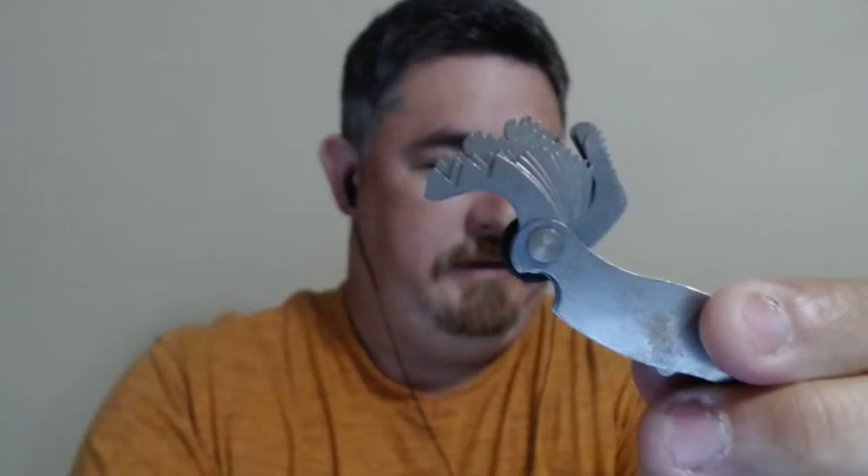And I have a thread gauge here. So, one focus. So it's got a bunch of teeth on it. And there's a number on each one of those. On each one of those, there you can see it. That's how many teeth per inch it is. So this is a 10.

So 10 is either a 24 or a 32. Excuse me. And this does not have those sizes. Oops. Here's a 32. So the thread gauge does have a 32, and it looks like that is it. It mates nicely with the screw. Yeah. So the teeth match. So it's a number 10-32.

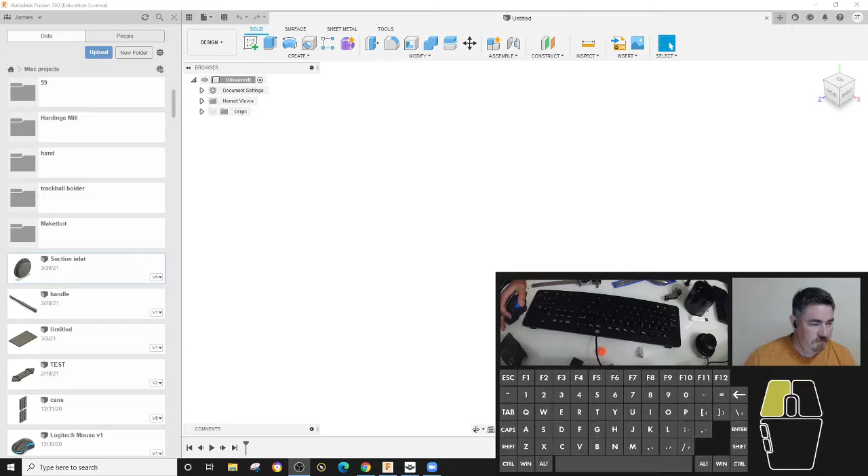So where did my pencil go? So that is number 10-32. So I wrote that on my drawing here. And I'm gonna draw a little picture of the snorkel going back, and time to measure that. There it is.

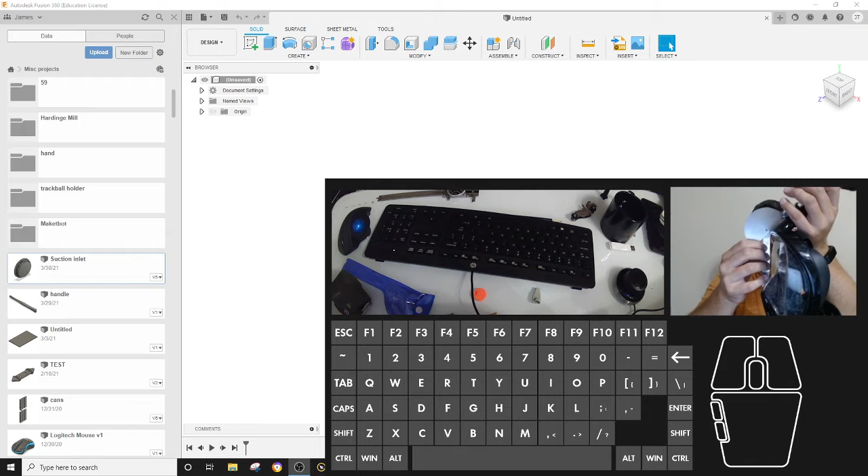My work area is a little cluttered, so I'm just gonna kind of hold this up and just eyeball it. It doesn't have to be exact, but it looks like it is about at 45 degrees back. It was almost exactly right there. I see. And so I just put it kind of on that forward edge and made it so that the beam, this part was parallel to the glass, and then this part was parallel to the snorkel. So even though it wasn't resting exactly on it, it was probably within a degree or two.

And the rough number coming out close to 45, that probably just means that 45 is the number. When you're measuring things, there's always an amount of rounding you have to do to say, okay, what did they really want it to be? Would they really have done it at 43 degrees, or did they actually just do it at 45? Have you ever been confounded by something that really was just an odd angle, like 42 degrees? Yeah. And so sometimes, it's experience to know when that weird number is supposed to be that weird number. When it falls on something nice or when it falls on something strange.

Yeah. Especially on measuring thicknesses and things. Sometimes you get to a real weird number, but then you do the conversion to metric, and it's right on like 10 millimeters or something like that. Yeah, it's like 99.999 millimeters because it does a weird conversion somewhere. It's like, okay, this is a metric part.

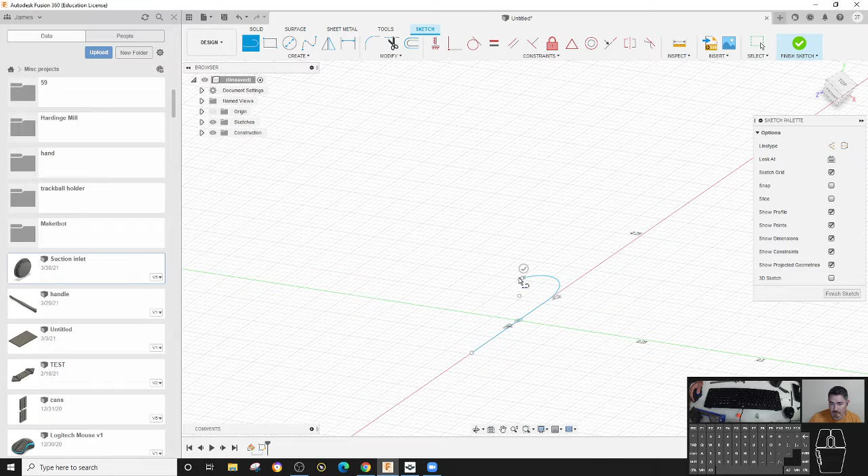So now I'm going to just create a construction plane. So I'll add an angle. I'm going to pick that line, 45. And say okay. So I'm going to create a sketch on there. And just draw a line across. Oops. Because I have those tangent arcs. I want to hold it. Come up. And I didn't hold it again. There we go. I don't know if I have a zero length line segment there. There we go. Take that out.

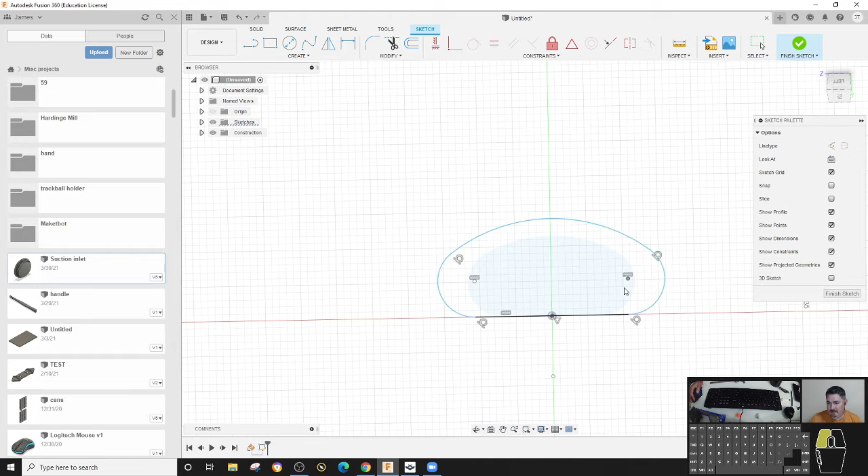All right. So we've got this kind of a shape here. And now it is time to do some constraining on this thing. So first thing, I'm going to tell midpoint to this line to there. That to be tangent there. That to be tangent there. Tangent there. Tell these two center points to line up horizontally with each other. And now it's behaving nicely. So this is what I was talking about, doing your sketch rough and then just going in and checking to make sure it works. Piece by piece, constraining the behavior.

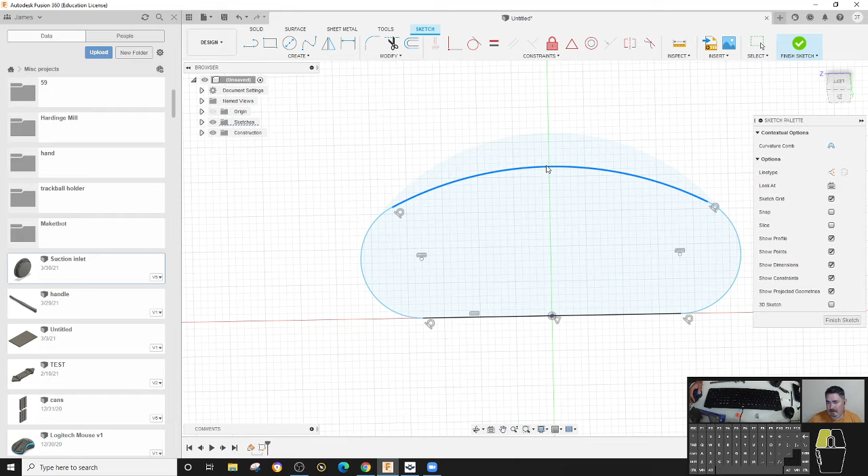I remember that I had a little extra zero length segment there, so I erased that, and now you can see it's not tangent anymore. So I'm going to add that tangent back in. But I can see that as I'm grabbing one point and moving it around, it's still behaving the way I want it to, and that's what we want. And so grab an arc segment or a point of some kind and move it around, make sure that it behaves correctly and stays the same shape that you want before you start adding any dimensions to it.

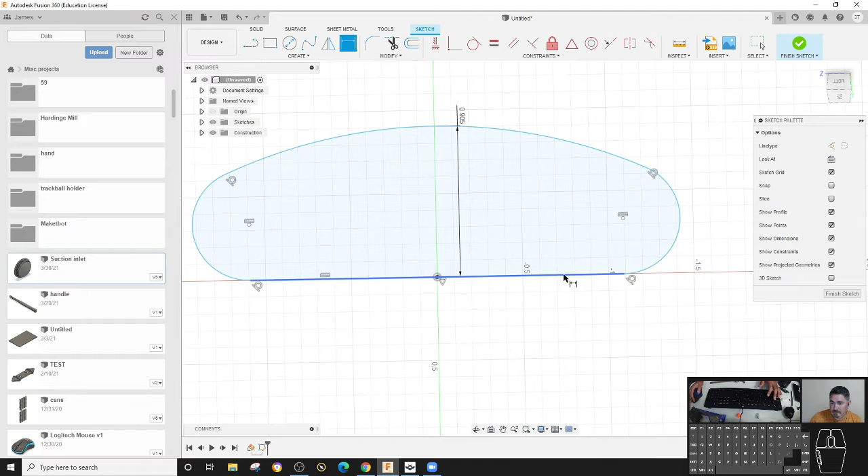Because now I can go in and add my dimensions pretty easily. So I can dimension from here to the tangent point there, and that's supposed to be 0.905. So I made it really big, kind of blew out my proportions, so I'm just going to drag this out so I get more towards those proportions that I want. And then from here, I dimensioned it kind of to the tangent point. So from there to the tangent point was 0.875.

Again, I'm going to pull that back out. And then dimension from the tangent of there to the tangent of there. And that was 1.9. And so that really gives me about how much of a curve there is there. I'm just going to finish. And realize that I did that upside down, because that should be the upper side of it, not the lower side of it.

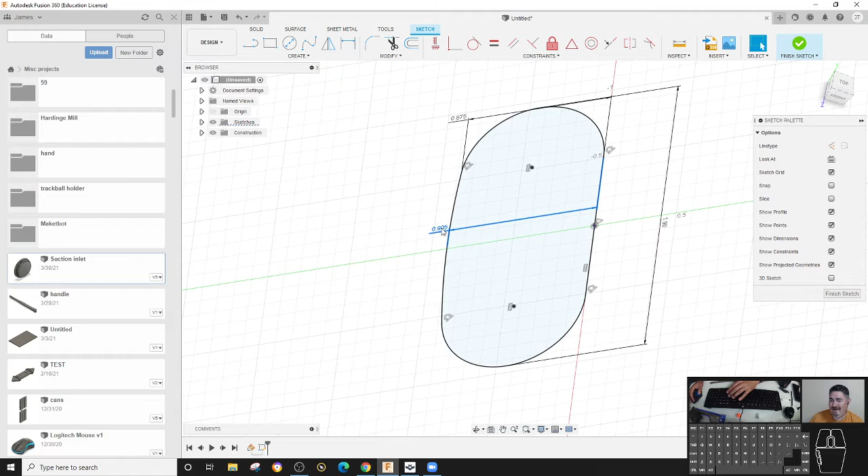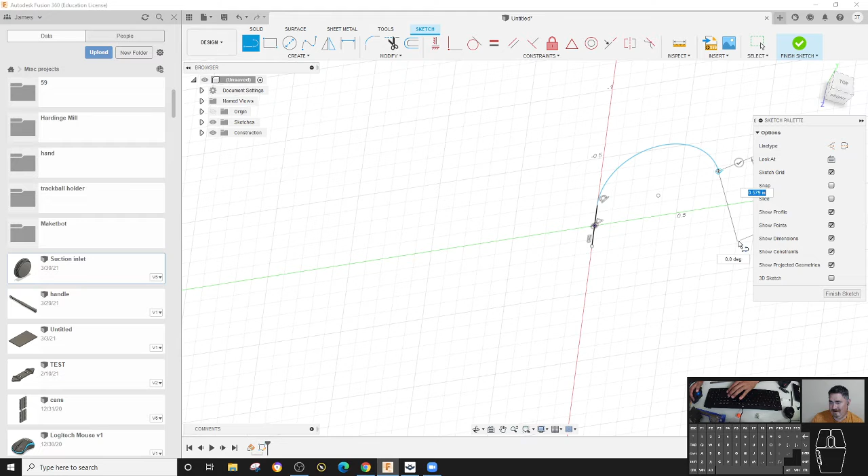So I'm going to go back into here. Could you just mirror it once you finish an actual piece of the part? Yes, but I don't want to do that. I'm going to just erase that. Understood. Erase that. Erase that. So I'm just going to take that arc out. Redraw it. You'd much rather do it right than just move it to the next correct state. Yeah, because then you're constantly trying to fix things.

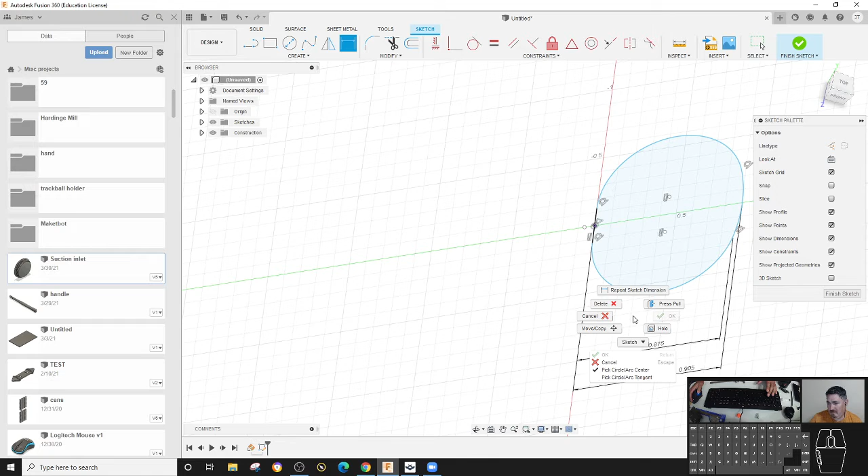So we get rid of that also. So we'll just do this again. But this time the right way. Yep. That's what happens if you don't stretch things out beforehand. Sometimes they do that. There we go.

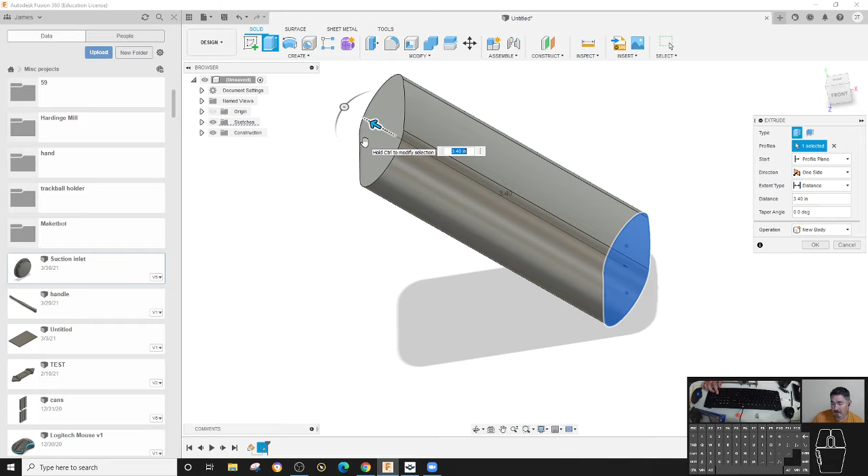I really don't need like 3 inches. So I'm just going to make it like 3.4 inches long. Because it doesn't really matter where that is. Because if it's on here, then I've only got this much space. If it's here, I've got that much space. So maybe I'm going to put a, yeah. I'll just leave it like that. Because I think I'm going to do something for up here maybe. Actually, it really doesn't matter. Because maybe I'll do a circle and a bigger clip just to see how it goes.

What do you think is better? Trying to do just a base for one of these clips and the clip goes in, or having it so I can just permanently mount that. The mount seems like it's got a better hold than the clip. The first one, doing this clip, this mount, or yes. So yeah, this one's making a base so this can slide into, that'll be attached to here. Yes. Okay.

What do you think? It's gonna be in the pool, the ocean, lake, the river. Probably more pool and river, but our pool is saltwater. But this weekend we're gonna go to the Kings River to go camping, so it'll be in the river and stuff. So that was a good question. One of the things we're going to talk about when we talk about your projects is the requirements for it, and one of those is where is it going to be used, and stuff like that. So does that help you give a recommendation?

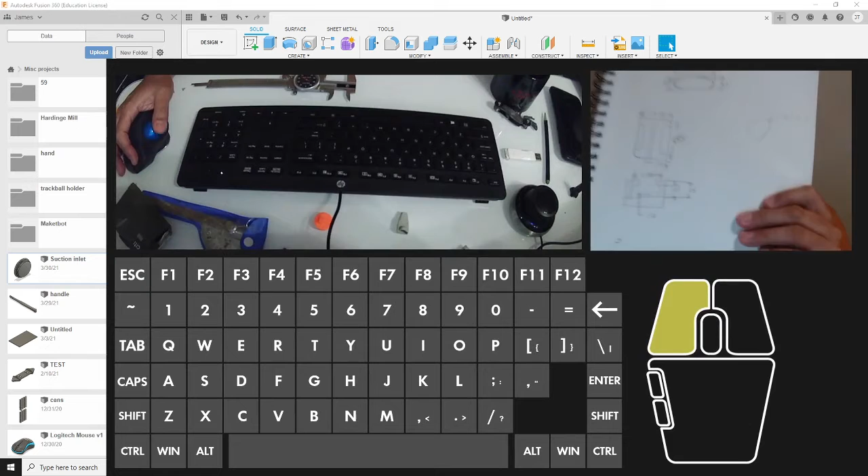And so last night I had already gone through and measured that out. So my son is still sleeping. We're just gonna do this without him.

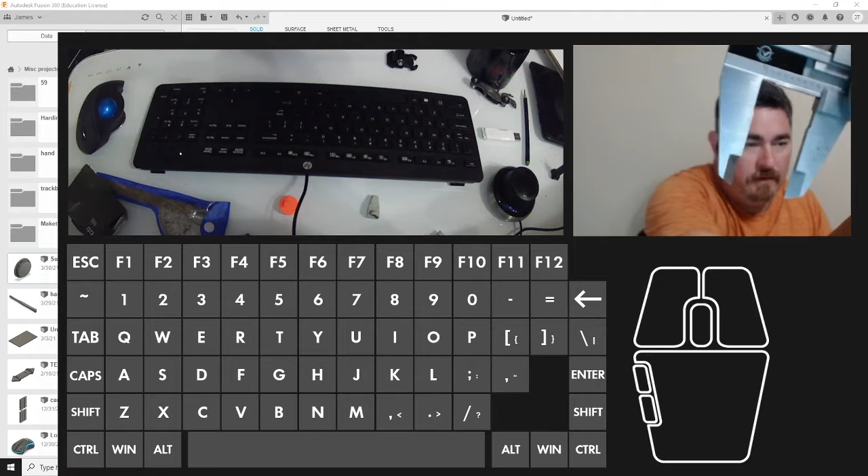So you can see the dimensions here for the clip mount. I didn't include everything, so I probably should get that dimension between those two. But that's kind of the dimensions that are needed. The outside dimension really doesn't matter for the mount. And then the bottom will replace once we make it match up to this. So I do need to get that other one though. So make sure that this is the right clip mount for this part. And, point 842.

So I just added that right there. Come on, focus. This camera doesn't like to focus sometimes. There you go, 842. And you can see my dimensions, they don't follow all the rules. I just stuck that one inside the envelope. But even on the sketch, I try and follow some of the rules.

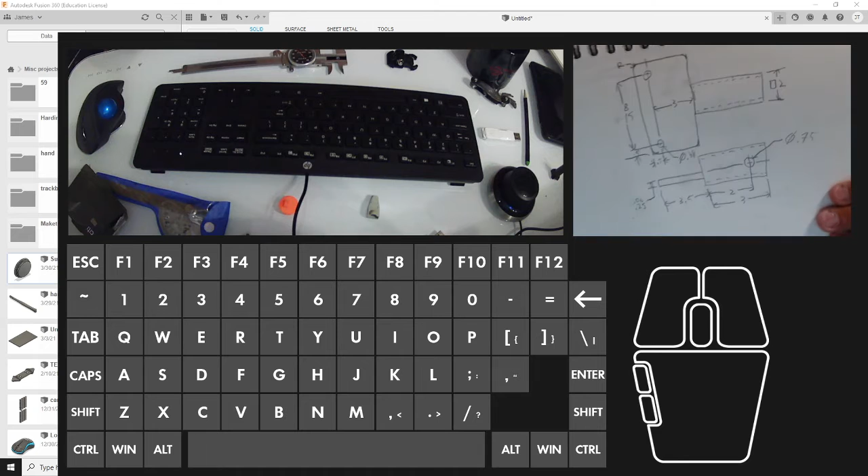Aren't the rules more for giving technical descriptions rather than for prototyping? Yeah, the rules are more on the final drawings, and so we don't have to follow those rules on our sketches. But I still kind of default to doing it a little bit. So like here's another sketch I did of something. Even when sketching, you've got the instinct to be drawing. Yeah.

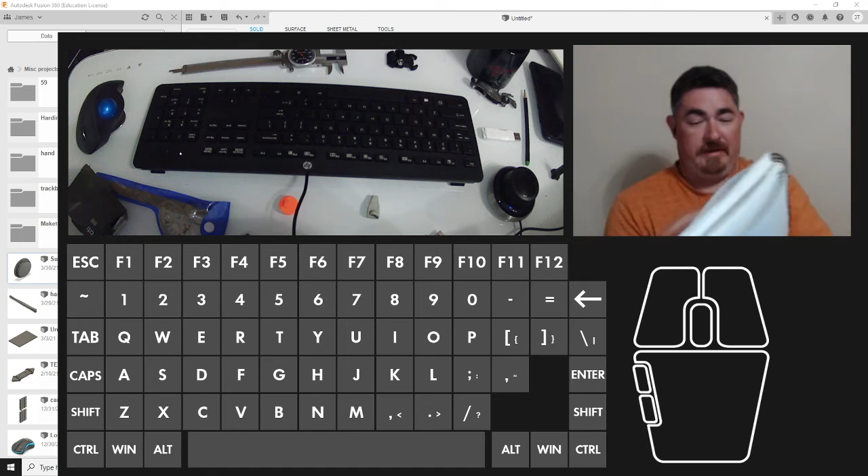What is this? So, I don't know what that is, but yeah. So I'm always constantly sketching between these two sketchbooks. I've lost that one and it was sitting on the floor right here by my desk. I just saw it this morning.

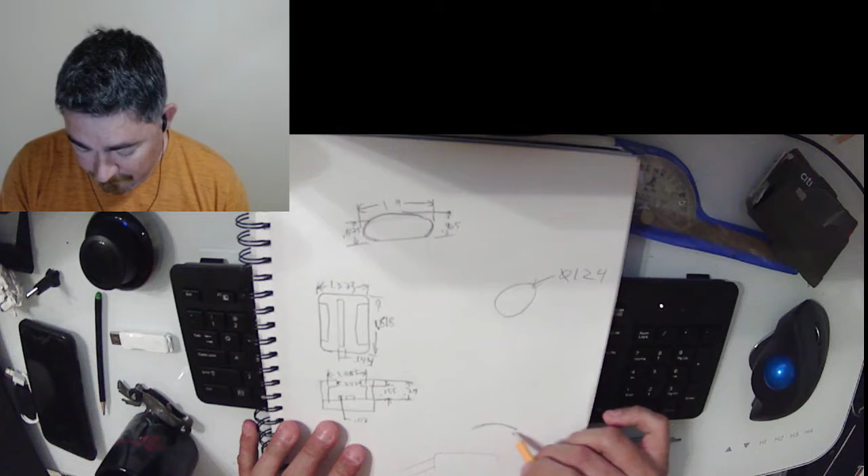All right, so what do I want? All right. So I'm thinking that I'm going to have kind of that shape, but it's going to have the convex bottom and then it's going to go up. Flat bottom. So it'll be just basically the regular clip, just with the convex bottom on it. So just take this, but convex to the bottom, or concave it.

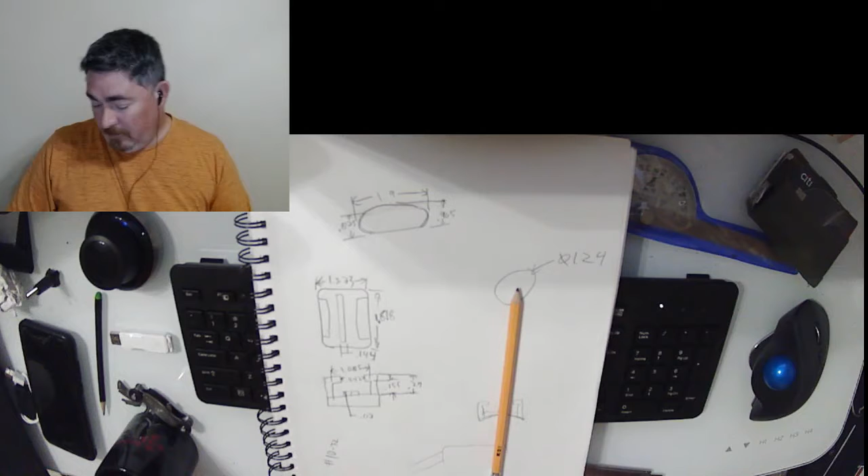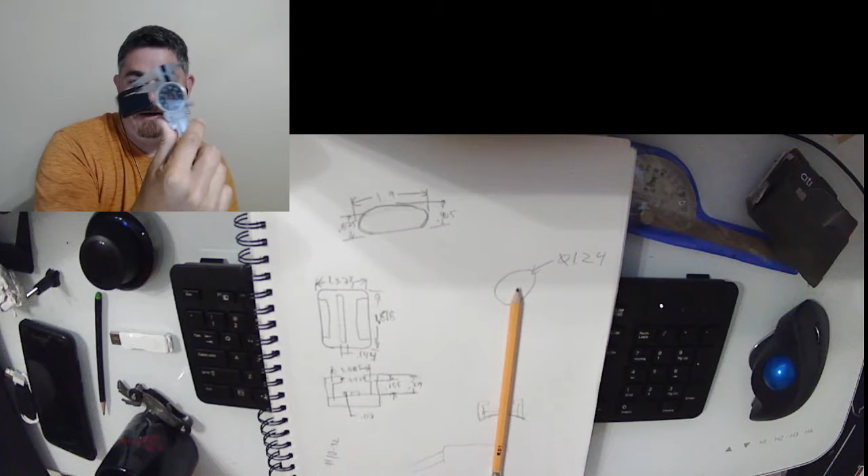Do you have an idea of like the minimum thickness that would be sturdy? So on these ones, it is, I don't know what these are, but I've found that in 3D printed parts, depending on what it is, the minimum thickness to go is like .03 or .04. Once you get bigger than that, you've got strength. These wall thicknesses here are a little over 1/8 of an inch. So I might just replicate that, especially since these are going to be pushed on. Okay. So I might just keep that.

But I don't want it to look square like this. I'm actually going to round it a little bit. Let's see. Here, that's got this here. Maybe I'll just cut these corners off here. Yeah, because you don't need to include those. Those are just a part of the part you're modeling. Yeah.

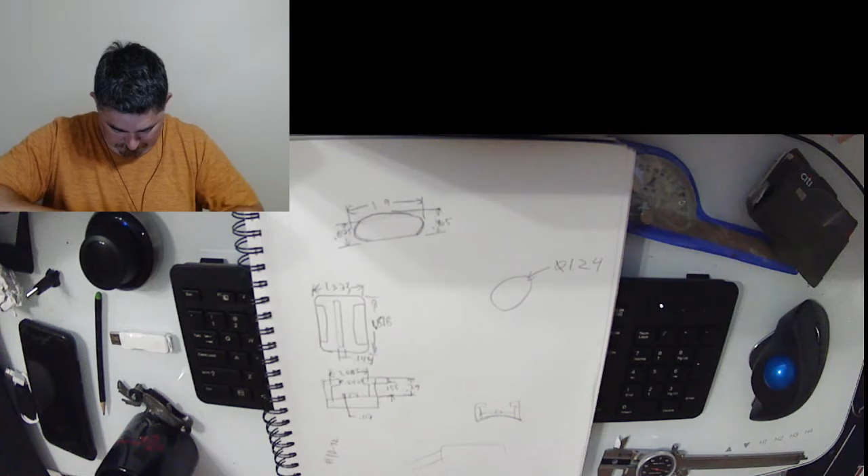And actually, I might make the inside spacing this .185 right here, that inside, because these are really tough to get in and out. I might make that a little wider. You have the control. So that way it's kind of a looser fit.

Did you cut out there, Craig? Hello? Yeah. Yep. You got out like halfway through your word.

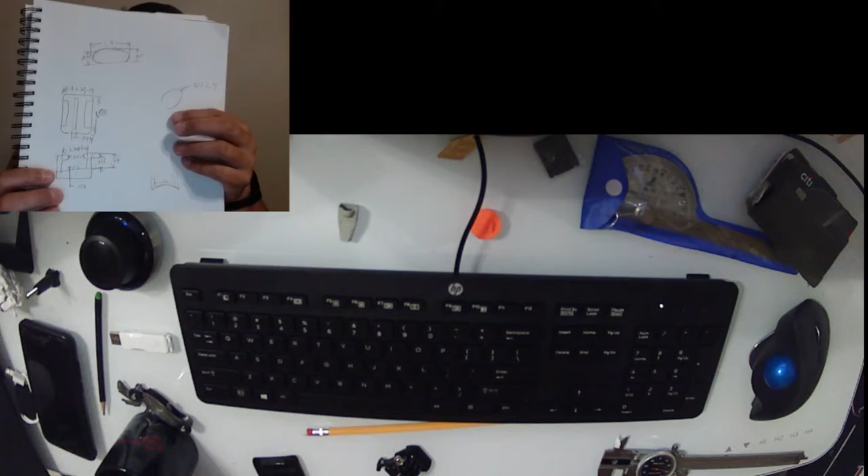Oh, I was just saying, I forget what it was, but you said you have some control or something like that. You have more control over adjusting it around the problems you see. You've had problems with it being a little bit too stiff, and so you can always adjust your version of it to be correct. Yep.

And just to make sure that this distance here is a critical dimension, because that's how long that needs to be. I hadn't actually written that down. So I'm going to record that right now. Time to pull out the calipers. Yeah. So that is 1.1. And so I have that.

And the 3D printer is going to oversize everything a little bit. This printer oversizes things. It draws about a 7/1000 line. So I always make sure that I subtract 7/1000 from any dimension. So that gives space for the clearance on both sides. It's just one of the things that I know about this printer.

Is that because the printer is moving the tool path along the dimensioned outside? Yeah, so it's drawing on the line. The thickness of the plastic that it's extruding actually steps over. Yeah, and there are adjustments you can make to adjust that. But for me, it's easier just to make the adjustment on the model than to spend hours and hours fiddling with the printer. It's a lot more direct just to have something that prints nice the first time. Yeah.

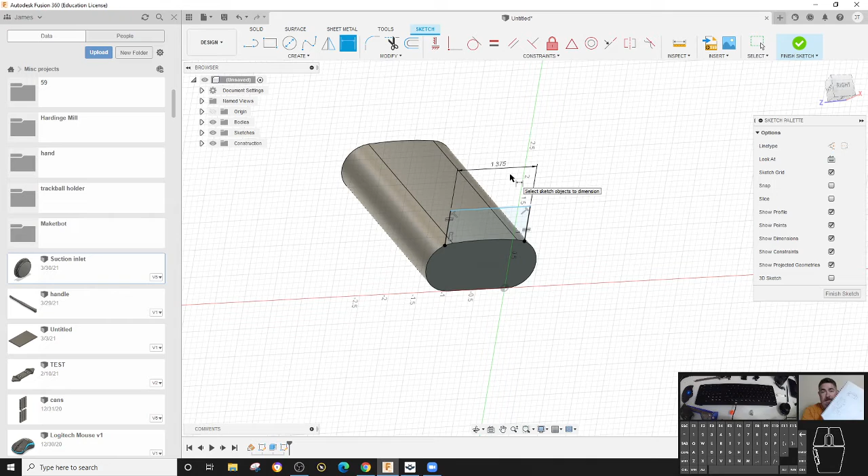I don't know why it's doing that. Oh, because this one was on the circle, so now it's staying on the circle even though the circle's not there. But if I keep it out there, I'm fine. And then that's going to be 1.375. When I measured it was 1.373. So I just rounded it up to 3/8.

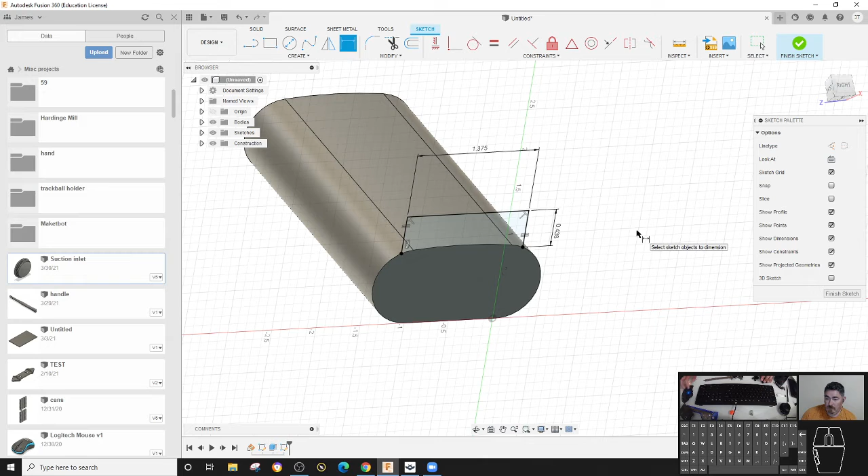The overall height of the little things on it is 0.29. It needs .155 for in there. So I'm gonna just add in some. So I'm just gonna make that 4.375. I'm just gonna finish that, extrude it. I want it to go up a little bit, so I'm gonna tell it to go back 0.5, and I want it to be 0.5.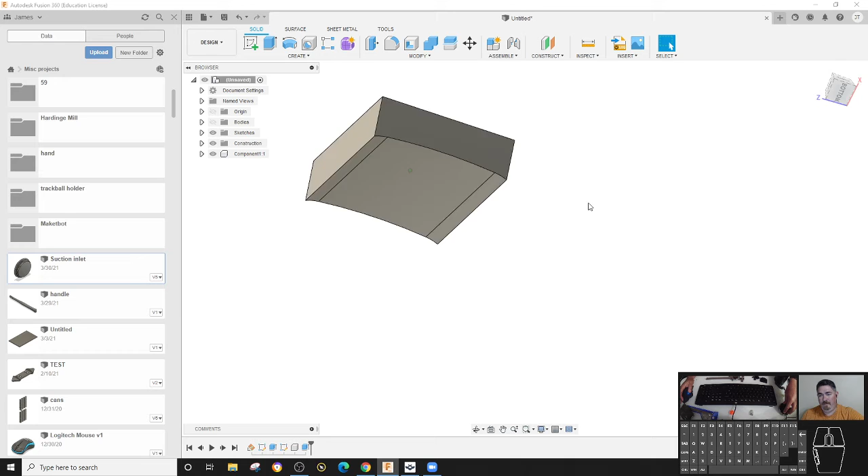And I want it to be a new component. So now I've got that new component there that has the right profile here, and it's got the right height that I can start working on it. Does that make sense? Yes. Alrighty.

So now, what should I do next? What do you guys think? Would now be when you start figuring out the profile to extrude and cut through the center of it? Yeah. So perfect. I'm going to cut this out. And I'm not going to worry about the little thing in the bottom. That'll be its own feature? Yeah, the little thing right there in the middle. I can add that back in easily.

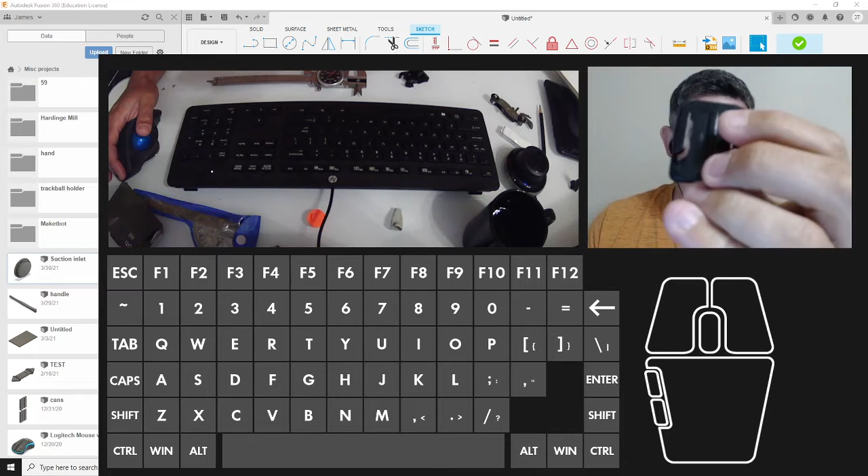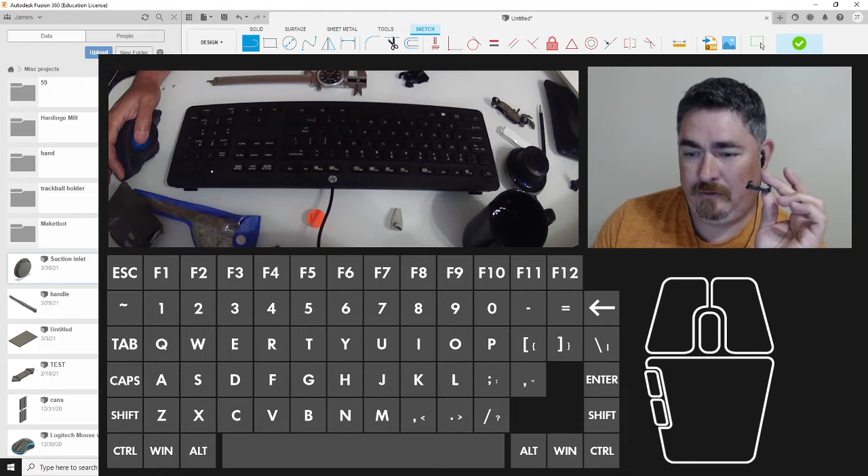Trying to make it so that I don't cut that and then I have to go back and cut the front and the back of it anyways. It'll probably be longer to try and keep that in it right now. So I'm just going to take that out and I'll add it back. And because this part is symmetric, I'm only going to draw half of it. So I'm going to go from the midpoint, down to where my base is going to be. I'm going to go over, up, up. So I'm going to draw half of it.

That way I'm saving. Your keyboard is in the way. Okay, there we go. So I have that much of it because I can mirror this over to the other side. And that saves a lot. It gave me one line instead of 3 lines that I'd have over here. And I can pick this line.

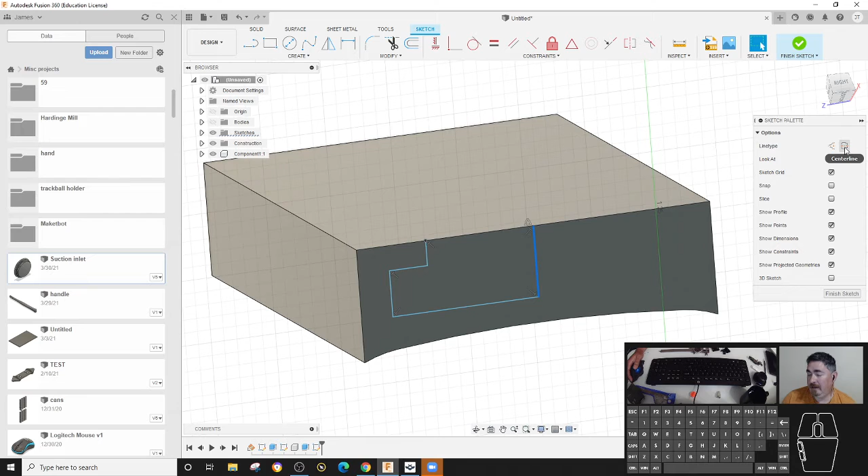One of the new things that they added in is the center line option here. There's a center function in Inventor, where if you make that into a center line, now when you dimension from that line to another point, it gives you the full distance across. Oh, that's interesting. Does that center line actually enclose geometry, or is it open at this point? Yep, it encloses. Okay. It's not a construction line. You can make a construction line and a center line. There's still the construction option here. And that is very interesting.

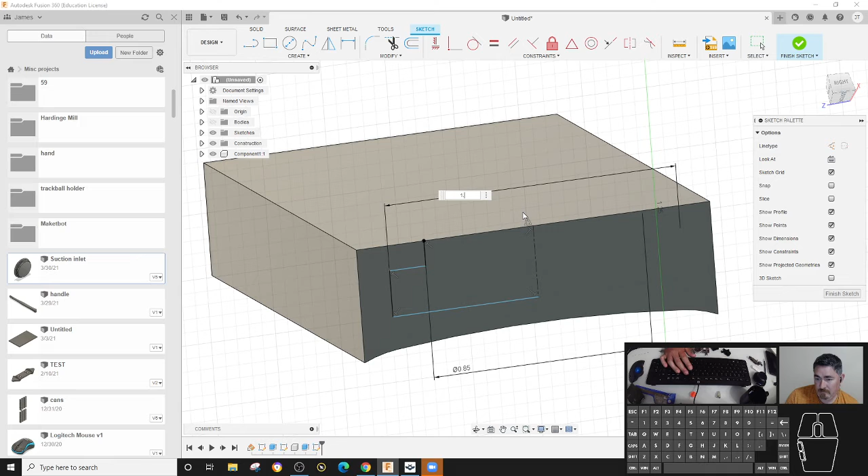So that was supposed to be 0.842. And actually, plus 7 thousandths, so I'm going to make it 0.85. Make it a little looser, a little easier to use. The same thing here, from here to here. That's supposed to be 1.085. Oh, 1.1? And so I need to add my 7 thousandths, plus I need to add a little extra. So I'm just gonna make it 1 1/8. Okay.

That dimension there needs to be my 0.155. I'm just gonna give that a little extra space too. And so those are really my critical dimensions there, where this isn't as important. It already had the 0.29, so I'm just going to go with that. So that gives me a good thickness there and a good thickness there.

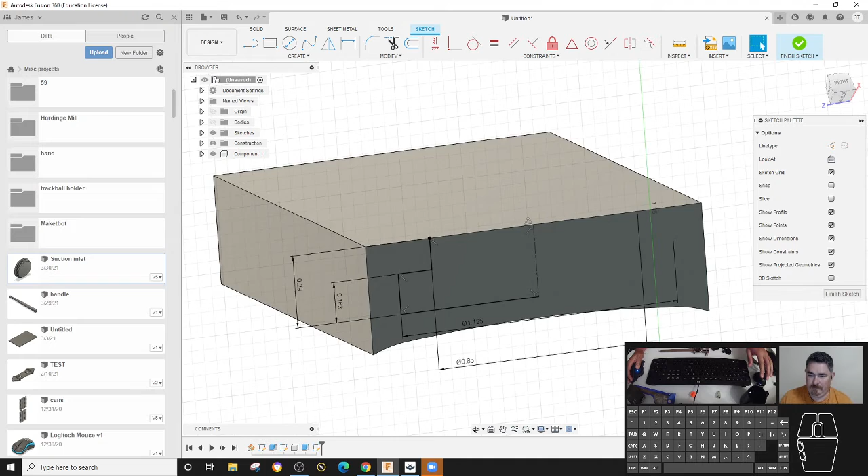Let me just verify. Helps if I hit the right button. So I'm going to dimension from that point to the tangent point there. That gives me 0.08, so that's plenty thick. That's structural? Yeah, because that's the base that it's going to sit on. So yeah, that's good. I remembered you saying about 0.04 or so. Yeah, so it's more than that.

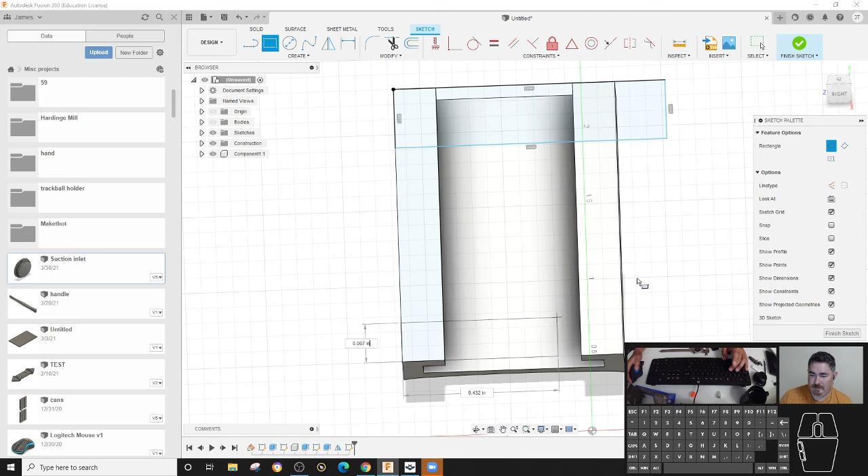So I'm going to finish, extrude that all the way through and flip it. And then I'll just mirror the feature across that mirror plane right there. And so now I have that. And so I can create a sketch on the top. I need to cut those down to the right size. So I'm going to turn that into a construction line, so that way these pick the whole thing.

I'm going to make those. You can set the edges to construction lines? Yep. Okay, I didn't know that. The projected edges, when they're projected automatically, they don't show purple like when you project them. But you can still make them into construction lines or center lines or erase them. I didn't know I could interact with them, so I always just included extra bits on the other side to finish. So I'm just going to pick that line and that point and make them coincident.

Did not let me do that. There we go. Coincident there. And make this line here and that line there equal. That way these move that way. Oh, sorry, let me move this over. So now it's moving the correct way.

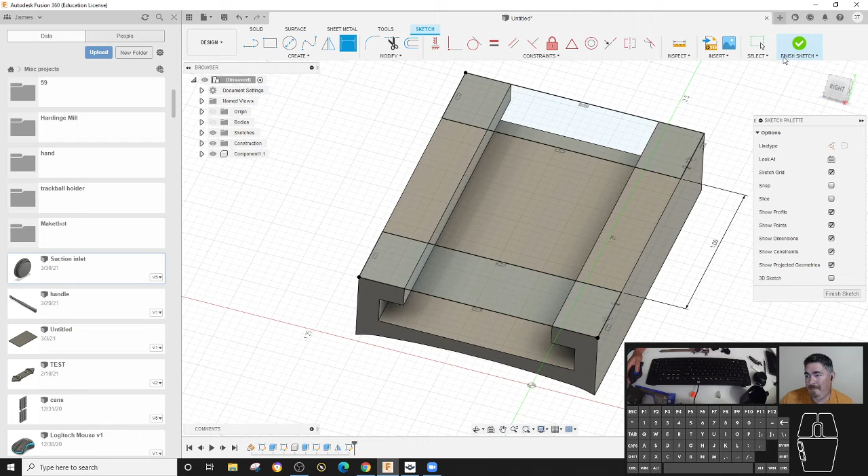And so now I can dimension this here for how much I want left. And I need it at least 1.1. So I'm gonna just say 1. Finish. And so with the 2 boxes I have 8 lines, so that's my max, so I'm still good there. I'm just going to extrude from there to there, and I'm going to go to that.

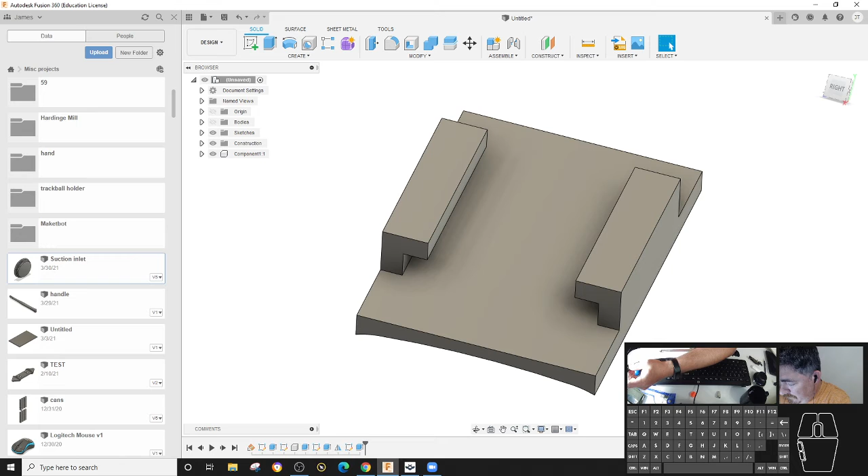Okay. And actually these have a pretty good chamfer right there in that corner. It's a good 1/8 of an inch, so I want to throw that in right now. So remember, if you know where the edge is, you can pick the edge through the object. Yeah, that's very handy when you're going through and selecting, like filleting corners and stuff. Yeah. So there we have that.

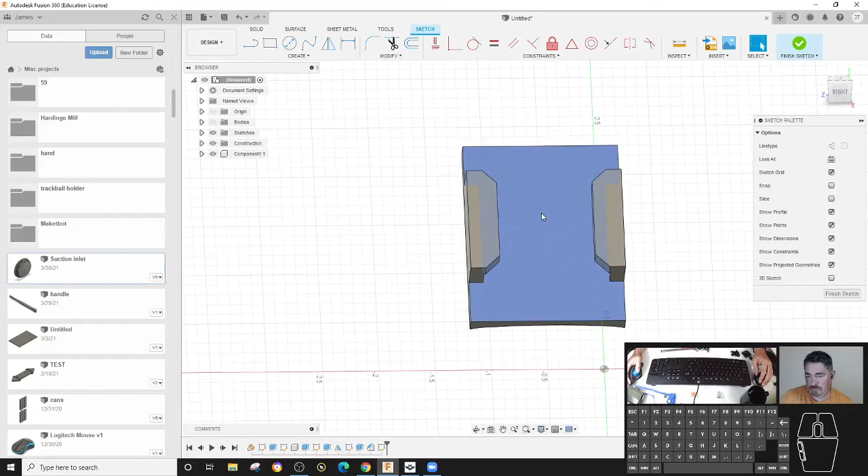And create a sketch there. I do need this to be centered, so I'm going to do a center rectangle. But for some reason that's not centered on the component, like my origin though. Huh. I suspect when you rebuilt the arc sketch, things got uncentered. No, it's just that plane. The origin of that plane that I sketched on wasn't the same as the origin.

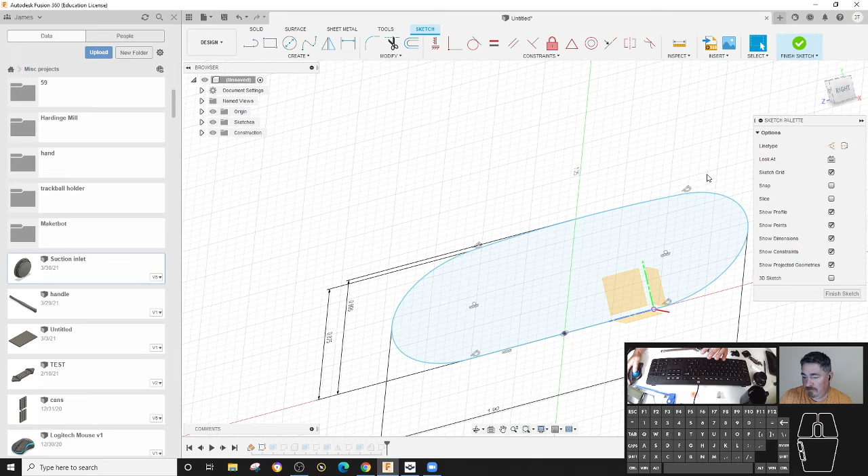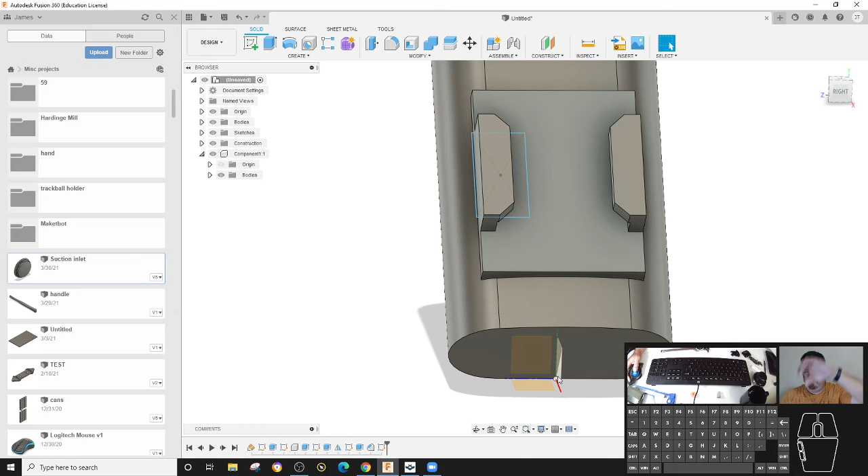So actually, I'm going to delete that midpoint. I'm going to project my origin and give it a new midpoint, and now midpoint my origin to that line. Does the origin need to be projected? I just did. I don't know if it had to be, but there. Well, usually on a sketch, this icon here will be at the origin, will be the actual origin. When you create sketch planes, sometimes they're off.

Yeah, and I probably could have just done constraint, pick the origin. See, it'll let me pick it. But I'm used to just projecting if I have to. That's fine, I just wanted to understand what I was looking at. I did that change there, and everything was built right. Everything slid over. Moving the positions didn't send any sketch wonky. So now I can just make that vertical with the sketch origin, which is lined up with the part origin.

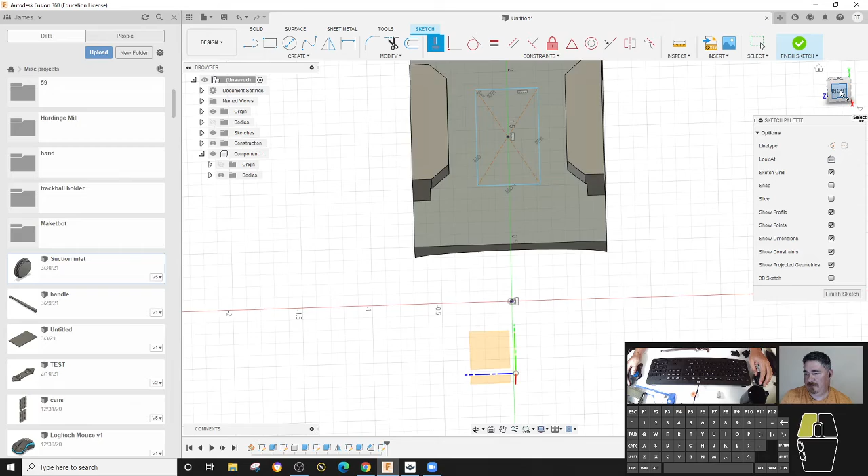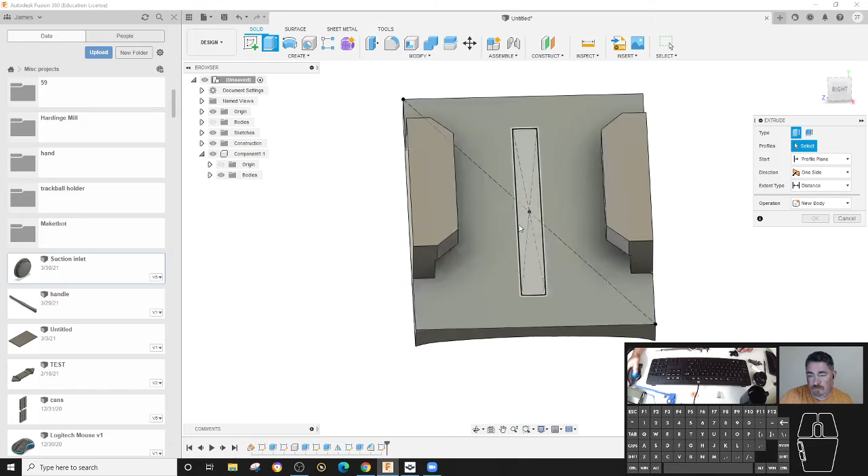So it's there, and actually I want that centered on the part. So instead of doing that, because I want this rectangle centered on this whole part, I'm just going to draw a line from corner to corner, and midpoint from there to there, and then turn that into a construction line. Now that behaves correctly, and that is going to be 0.14 and 1.3 and 0.06.

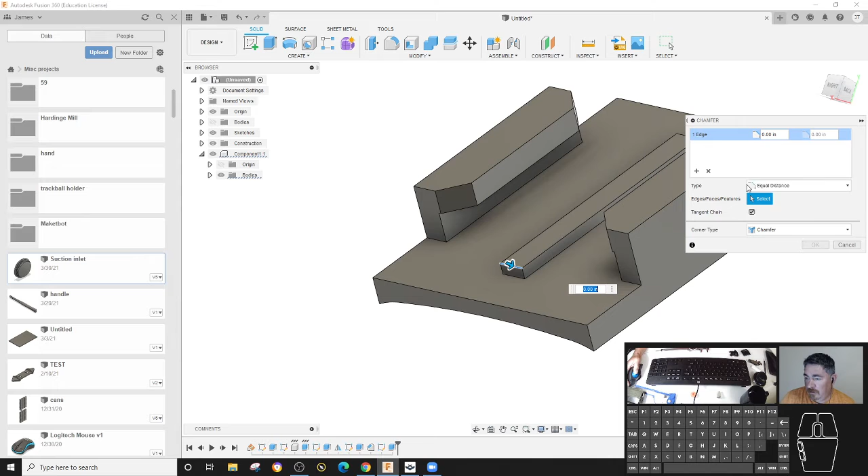But it's got a little chamfer here going up, but it's not a 45, so I'm just going to go in with chamfer, and I'm going to do 2 distances. Go back. Whenever you start with 2 distances, the first time you pull always pulls both. Then you can pull whichever one you like. Yeah.

So I want this one to only go down. If you zoom in, you can get more control. Yeah, I can also tighten more. So I'm just going to do 0.04. Yep, you can be as precise as you like. From there, can I add another one over here? I'll do another one over there. There we go.

So over here, you can kind of see the curve right there. It's tangent to the side. It's got rounds at the end of it. And then it goes up, so it's tangent right here, and then it kind of goes up and angles in. So I'm just going to use that, and I'm going to do a tangent arc.

Keyboard's in the way again. Yeah, of course.

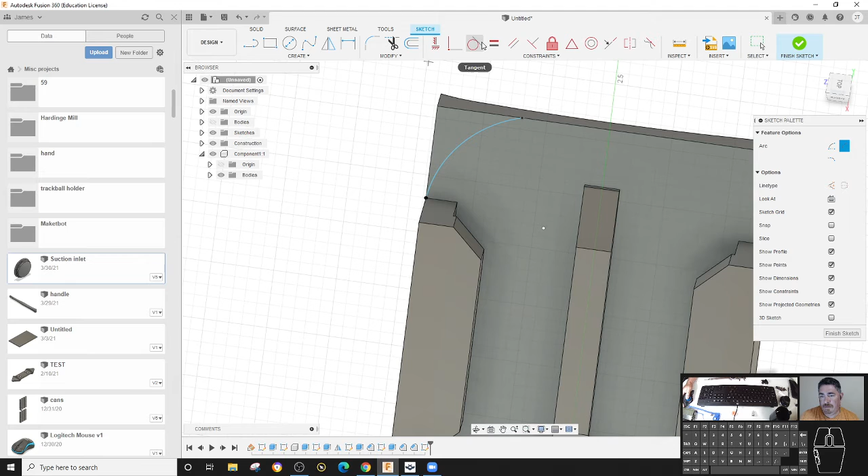And actually, I can't use the tangent arc because I don't have a line going this way. So I'm just going to use a regular arc, from here to here, and then I'll make that tangent to there. And I'll do the same thing on the other side. And then make those 2 equal. And that's tangent. And now I can dimension between those. I find it very weird having equal curves.

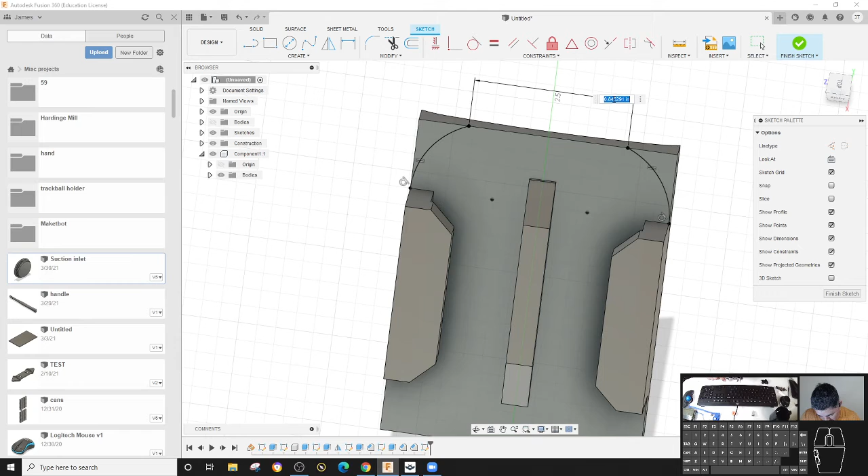What do you mean? So when curves are equal, equal means equal radius. And arc length? When you add the equal constraint onto an arc, it makes equal radius. It doesn't affect the length of the arc, it affects the radius. But not equal arc length? No. Okay, even though they're equal, they just have to be the same size of circle. Their center points are symmetrical across that center. No, that's because they're both tangent here, and so that's making the center point stay there. Yeah.

Yeah. But if it wasn't tangent and it wasn't there, it was just equal, the center points could do different things. They could move all the way around. But both those arcs are staying the same radius. Just as long as they're the same arc radius.

Yeah. So adding the tangent here is what makes the centers stay lined up, because they have to be tangent horizontal to that point there. Yeah. So remember, the line from the center to the point is perpendicular to the tangent line. And there we go.

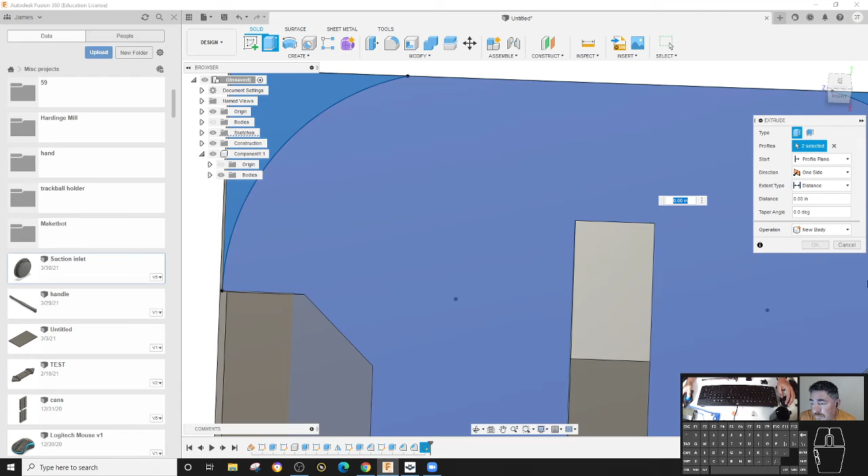So I'm going to finish. I'm going to extrude. And actually, those are really close to being tangent, but they're not. I could make them, but I'm going to leave them not. You're cutting all the way off rather than swooping down? No, yeah. Actually, I will make them tangent.

So in that case, now is the question. Since I'm going to make them tangent in both places, do I do them on a sketch or as a fillet? If I want to make sure it's going exactly there, a fillet would probably be easier. So I'm just going to erase all of that sketch. Finish sketch.

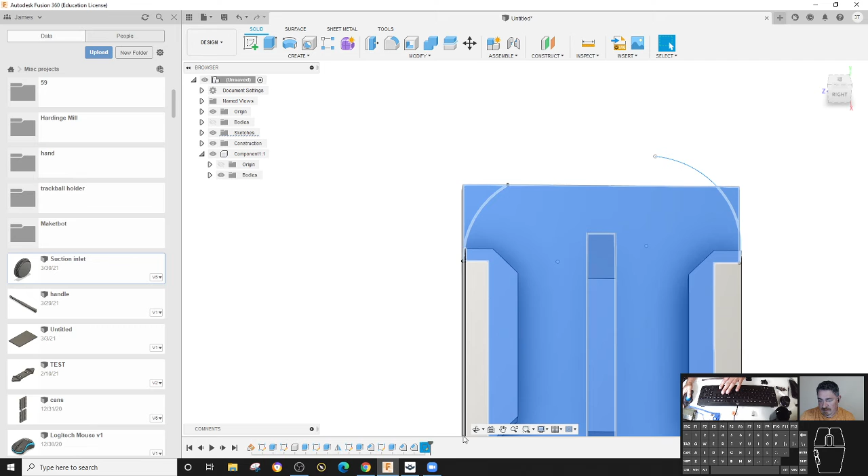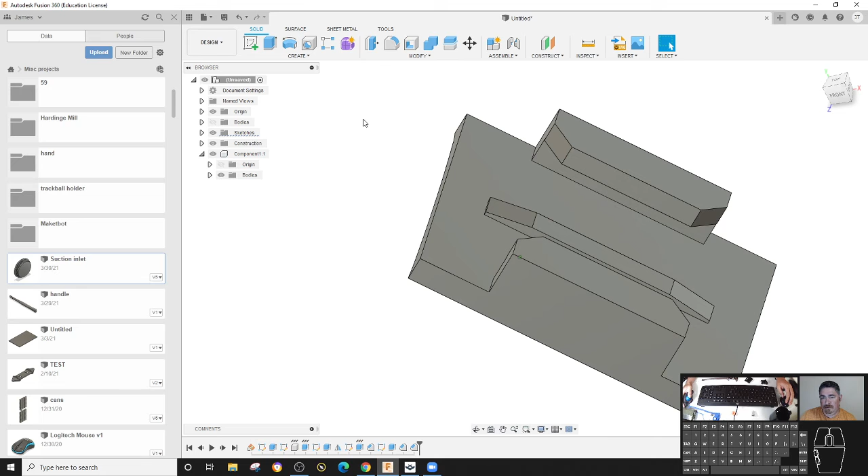Erase. I thought we were sketching because we were going to draft it down on that slant. Oh, no, I was going to just cut it out. Just round it off. Yeah. At which point, a fillet is very direct. But I need to make sure I have the right length. So that segment right there is 0.4. There we go. And then I'm going to fillet it. Nice and easy does it.

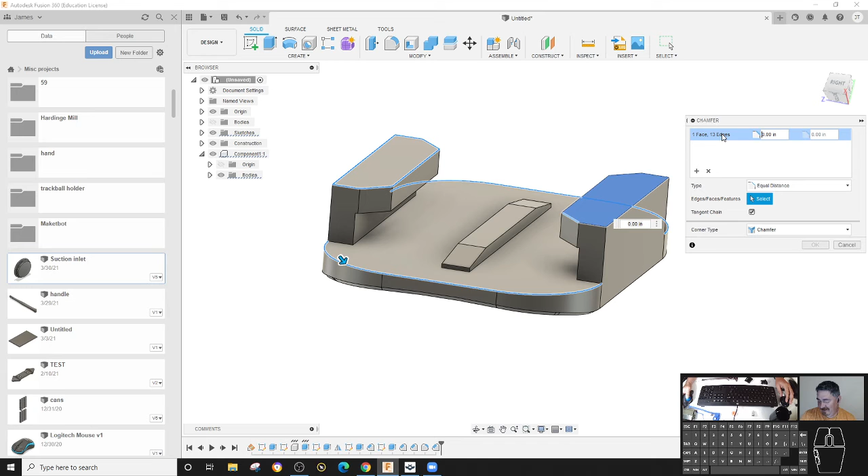Bottom corner. Actually, I'm just going to chamfer that. Equal distances. So it's not just a sharp corner down there. I'll do the same chamfer on these. Can't you just select the top face if you're going to go all the way around like that? Yes, I thought about that as I was doing it. Cool. Just means looking at the right places.

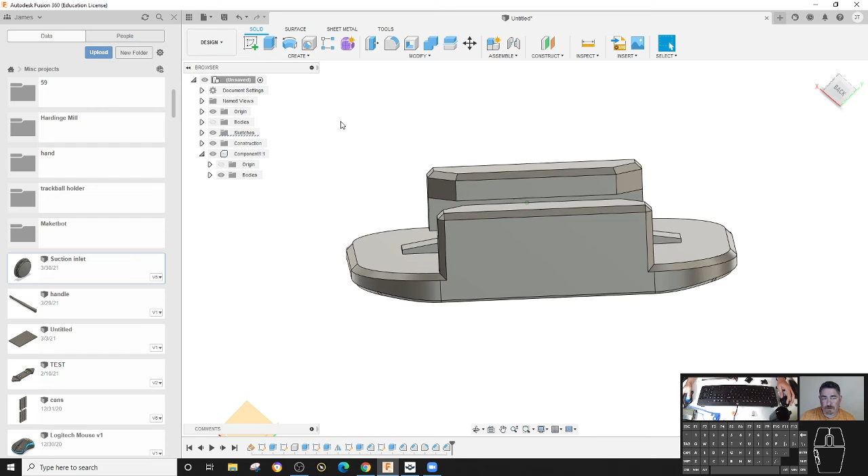Oh no, I don't want these. I was going to do those and realized, no, it's going to lock on those, so I do want those back corners. Just so long as you don't mess with the interior. Yeah, it's that corner it's going to lock onto. All right, so I think that is good. And I probably should have saved this a long time ago. Right?

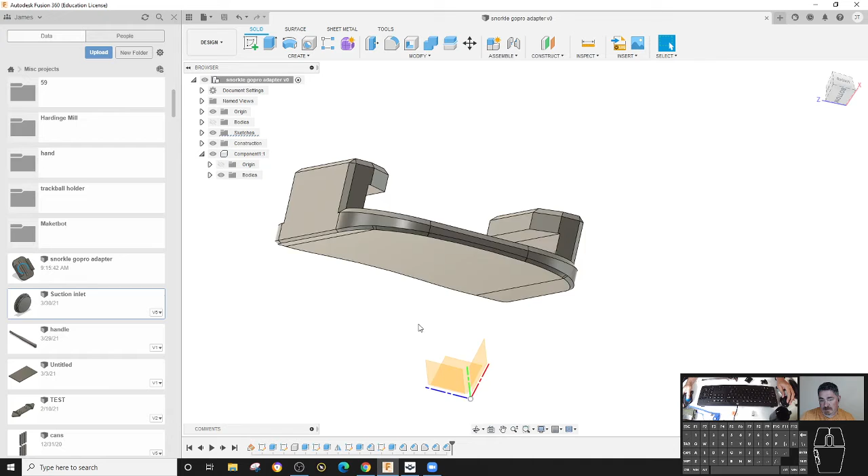Snorkle GoPro adapter? Yeah. There we go. So we've got that now. And so from here, I'm going to save an STL. Take it over to Cura. And I have my computer set up to automatically open the file in Cura. Oh, really? How did you get it to save so fast? I had to go manually move the SD card.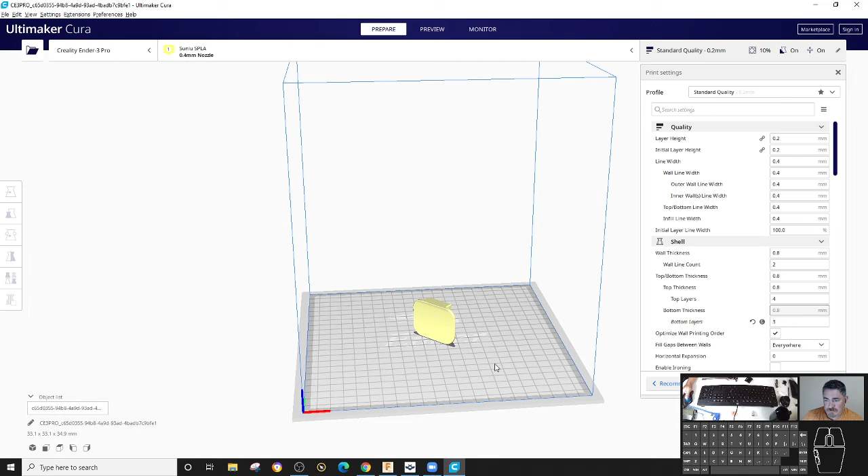How did you get the file to save so fast? Whenever I export an STL, Fusion takes a while. How powerful is your computer? I think it's pretty beefy, but it always has a long loading time up until the halfway point, and then it goes immediately. I thought that I was waiting in line for the server. No, because it's doing the export to an STL on your computer, and then launching. I thought it was passing it off to cloud computing. And then sending it to Cura, I think it's doing all that on your computer.

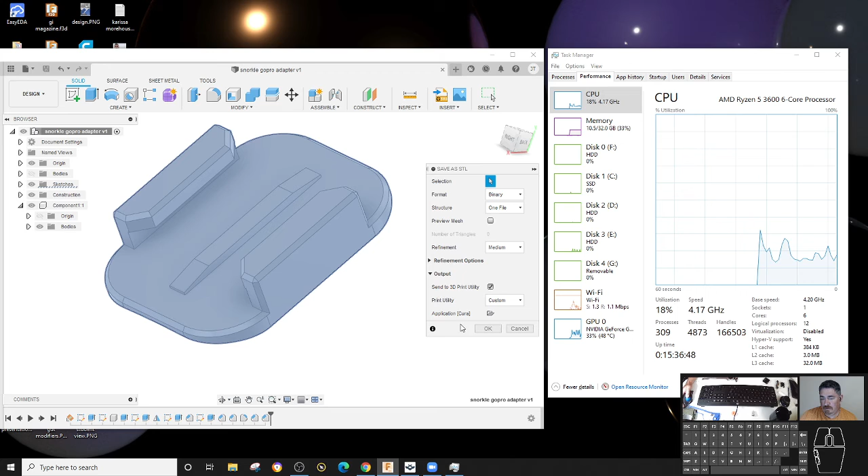Okay. I mean, we can watch and see. So I'm gonna close this. And I'm wondering if there's a setting to stop sending it to the cloud and have it do all the computing on my computer. We'll have this up, and so get some baseline usage for this. Okay. I fully believe that it came from your computer if the computing was done that fast. I'm wondering where to find that setting. So let me say okay. So actually, I'm not seeing any extra usage at all. So it might be going out. I don't know.

Memory had a little tiny bump when I did that. CPU did have a spike. There was a small CPU spike as well, but my computer's not being used at all. It's only at 14%, and my memory's less than 30. She's ready and waiting.

And I just built this computer last summer, so it's pretty up there. They're M2 drives. It's an M2 drive on the hard drive plus an SSD as my second drive, and I have a good graphics card, and you can see the graphics card did bump there too. Kind of that same spot. Actually, it did a dip and then it came up. So now it's back to normal cycle.

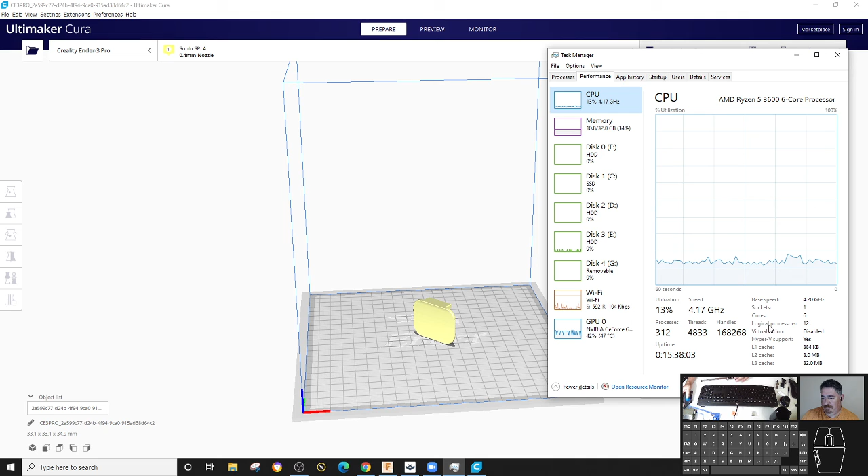It depends on what your computer specs are. I don't know how your computer stacks up to this. That might be part of it. I know my old laptop was a lot slower than this. I'm going to keep looking for settings. Yeah, check and see. There might be something.

So now it comes down to how do we want to print this thing. When we print, the strength is in the layer lines. If I printed this way, the layers would be going horizontally, which means the part would snap in half. The supports here would be strong, but this part here would snap off.

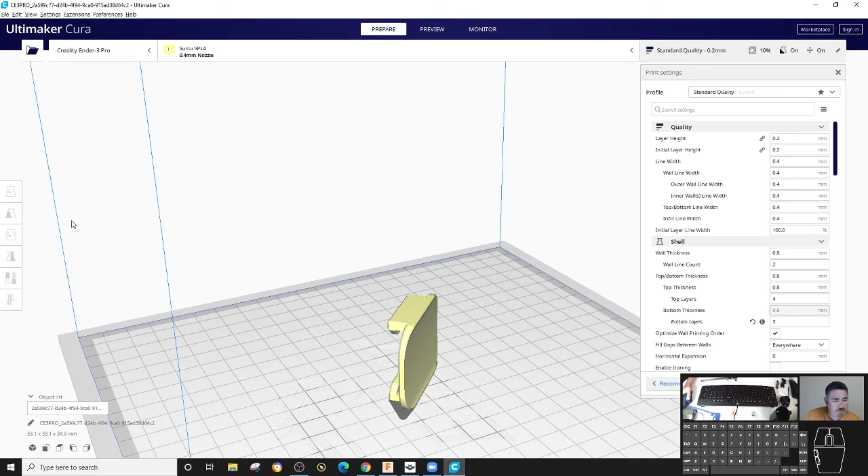If I do it, I'm just going to flip that down. Oops. And just go in and rotate that 180. So if I did it this way, I'd have a lot of strength this way, or kind of in the layer down here, but the towers right here would snap off. The whole thing would just snap.

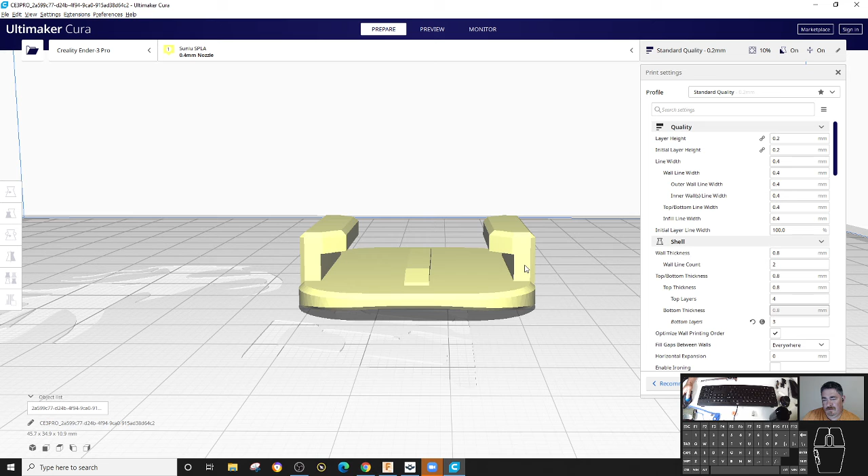And also, I'm going to have all support underneath here to hold up that curve. Looking at it, you might think this might be the best orientation to print, but it's really not. It's going to be weak. We're going to have a lot of extra support on the face that I want it to mount on. So that's probably not a good solution.

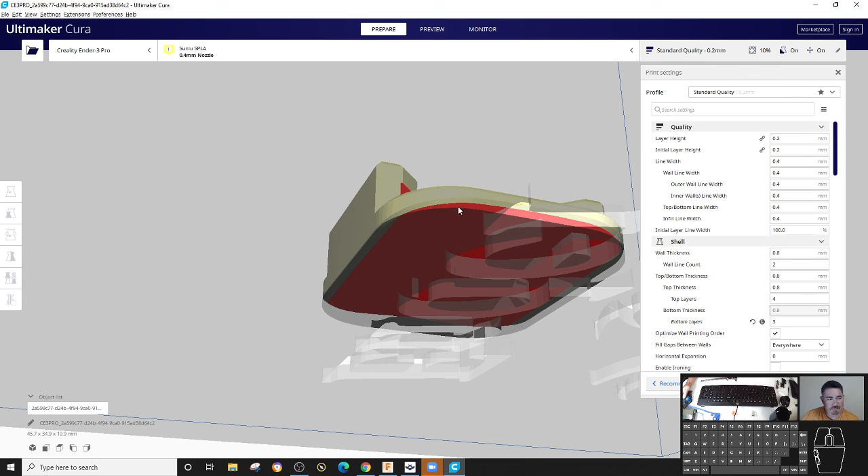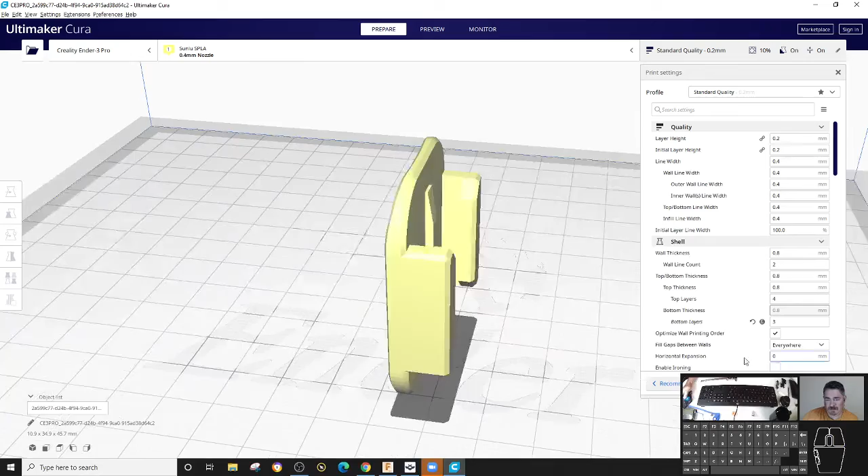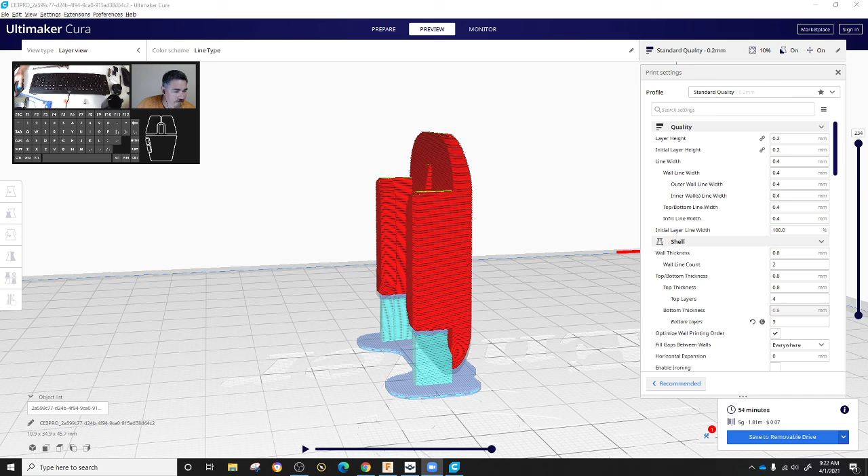If I go here, 54 minutes and only 5 grams of material, because it doesn't have to do all that support underneath the base. So it cut out a third of the material, that's why it didn't increase in time as much. If it had to use the same amount of material, the time would have gone up the same. And is this a part where you're worried about the layer orientation, which is why you turned it? Yeah, because now my layers are going this way, so within the layer it's nice and strong. You have the full strength of the layer. And I might add another wall.

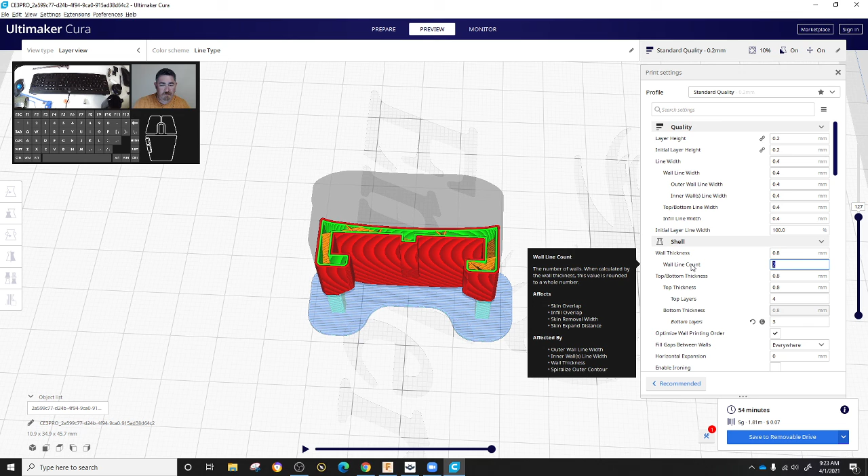Alexander asked if your projects have to take into account 3D printing. Alexander, it depends on what your project is and how it's going to be made. Part of the project is deciding, if we're going to make this thing for real, how would we make it? If it would be injection molding or machining or whatever, you have to take those processes into account. If it's going to be 3D printed, then yeah, you have to take 3D printing into account also. In everything we do, we always have to account for the process we're going to use to make it.

So I'm going to increase this to 3 walls, give it a little extra strength. That added a few more minutes, but now you can see it's got 3 walls of material here. So that's even more strength in there. I'm going to change the name, because when it brings in from Fusion, the name is really weird. I'm going to call this GoPro adapter, save it to the removable drive, eject it, and go put it in the printer.

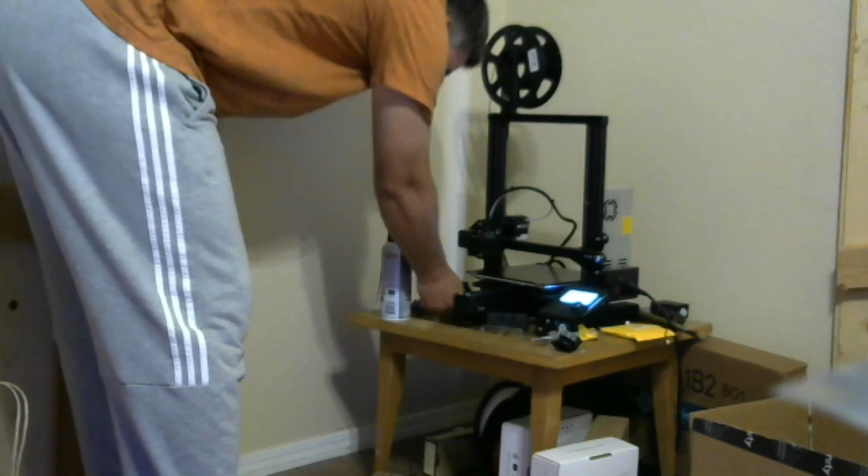So there's my printer. You said it's an SD? Yeah, just a small SD to micro SD, I think, to hand it to the printer. And it's warming up.